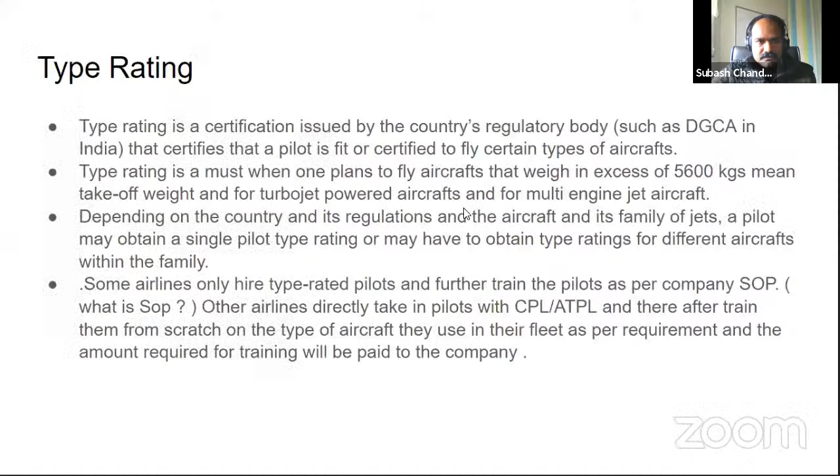So starting, I will just share the screen. I think it is unshared. You have to share it again. Yes. Yes, sir, shared.

So the topics for discussion are a small brief introduction on the history of flight, and we'll also be talking on basics of aerodynamics. Actually, this would be best if we were able to show some working model, or show the aircraft and then explain. That would be much better. But the problem is we have to take a lot of permissions in order to video shoot such programs or talks. We have to take prior permission. Sometimes we get permission, sometimes we don't. So there are a lot of hurdles.

So I have picked up a few videos from YouTube. As we keep discussing various topics, I will be playing these videos so that you get a better understanding of the topics. And we'll also cover the legal requirements to get the license, what all you have to do first. All these steps I have briefed to my best knowledge. So I request Captain Raghavendra and Captain Paresh, you can also pitch in in case you want to add a few things.

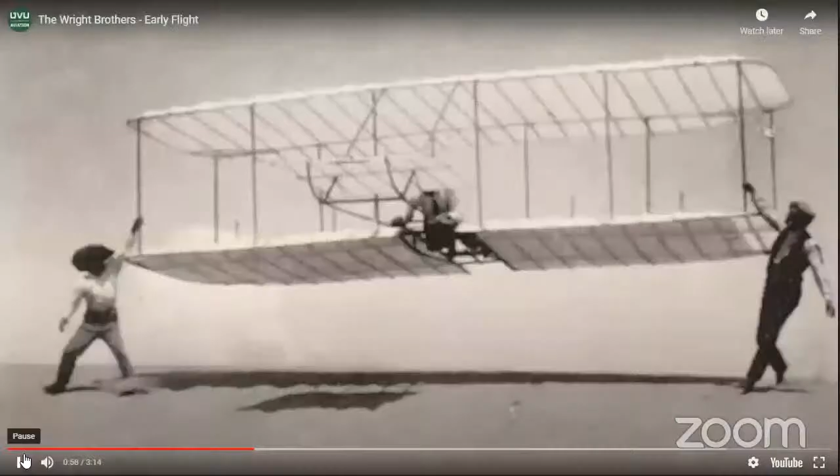In 1901, at Kill Devil Hills, North Carolina, the Wright brothers flew the largest glider ever flown, with a 22-foot wingspan, a weight of nearly 100 pounds, and skids for landing. However, many problems occurred. They decided to build a wind tunnel based on Francis Wenham's research to test a variety of wing shapes and their effect on lift.

During 1902, the brothers flew numerous test glides using their new glider. Their studies showed that a movable tail would help balance the craft based on the center of gravity, and the Wright brothers connected a movable tail to the wing warping wires to coordinate turns.

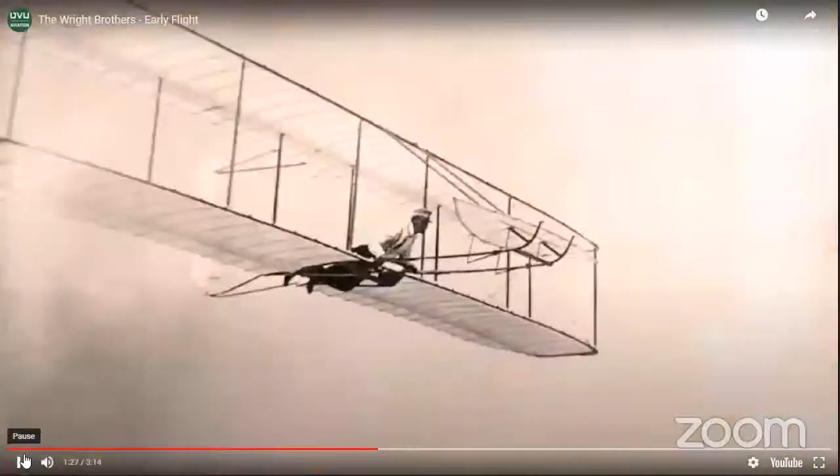After months of studying how propellers work, the Wright brothers designed a motor. This was attached to a new aircraft sturdy enough to accommodate the motor's weight and vibrations. The craft weighed 700 pounds and came to be known as the Flyer.

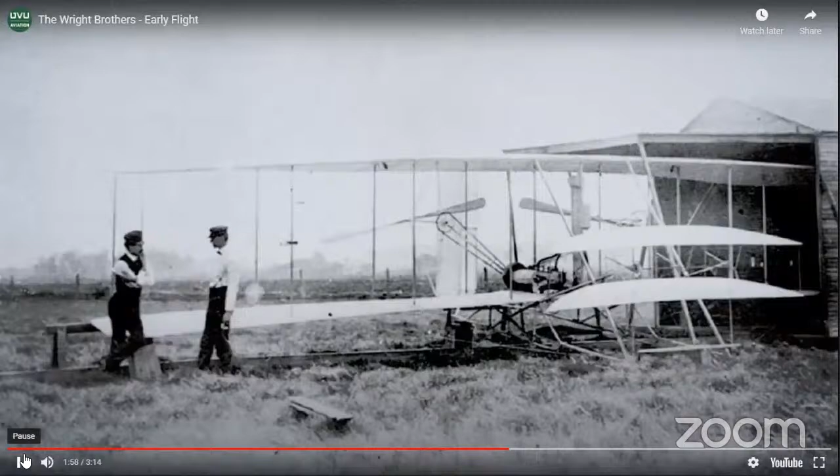The Wrights further refined the wings by covering the bottom surfaces with fabric. This resulted in a smoother overall wing surface, which enhanced its aerodynamic efficiency. The brothers continued to apply the fabric in the direction of the weave at a 45-degree angle to increase the stiffness of the wings.

One of the most innovative aspects of the 1903 Flyer was its propeller. The Wrights decided to treat the propeller as if it were a rotating wing. They reasoned that the same physics that generated an upward force or lift on a curved surface in a flow of air would also produce a horizontal force or thrust when such a surface was positioned vertically and rotated to create the airflow.

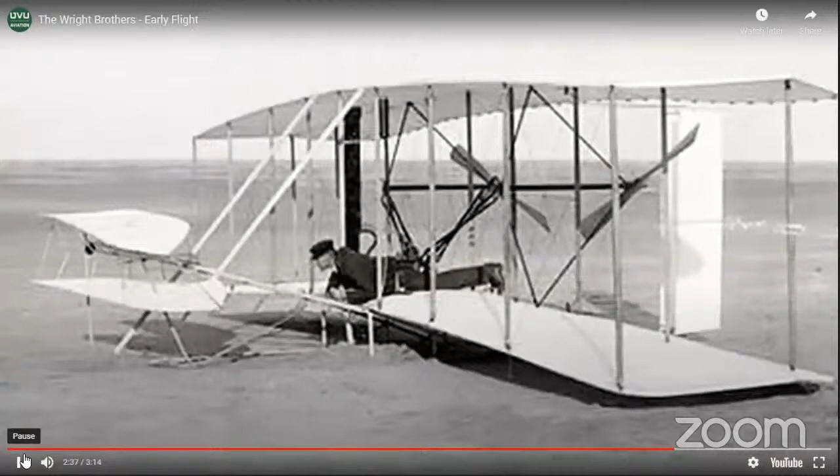The brothers built a movable track to help launch the Flyer. This downhill track would help the aircraft gain enough airspeed to fly. After 2 attempts to fly this machine, one of which resulted in a minor crash, Orville Wright took the Flyer for a 12-second sustained flight on December 17, 1903. This was the first successful, controlled, powered, and sustained heavier-than-air human flight in history.

In 1904, the first flight lasting more than 5 minutes took place on November 9th. The Flyer 2 was flown by Wilbur Wright.

So hope this video was very informative. It has explained the struggle of the Wright brothers.

Am I audible now? Yes, sir. Yes, yeah.

It is not just the first instance of them making this machine, because they didn't have ideas initially when they started. They thought just by having a propeller and a motor and then having a bird-like wing structure, they could make flying machines. But later on, they discovered and learned that altering the shape of the wing is one of the main aspects where you can achieve flight.

The next topic I am going to discuss would be basically on aerodynamics. What makes an aircraft actually fly? What is the thing which is generating the lift in the aircraft? Of course everyone knows that without wings, the aircraft can't fly. But only making a wing, what is the shape of the wing? All these things we will see in the next topic.

So from being a small aircraft carrying a single passenger, slowly to present day we are carrying hundreds of passengers at a very high level of comfort. This is what aviation has traveled from 1903 to 2020, roughly around 120 years.

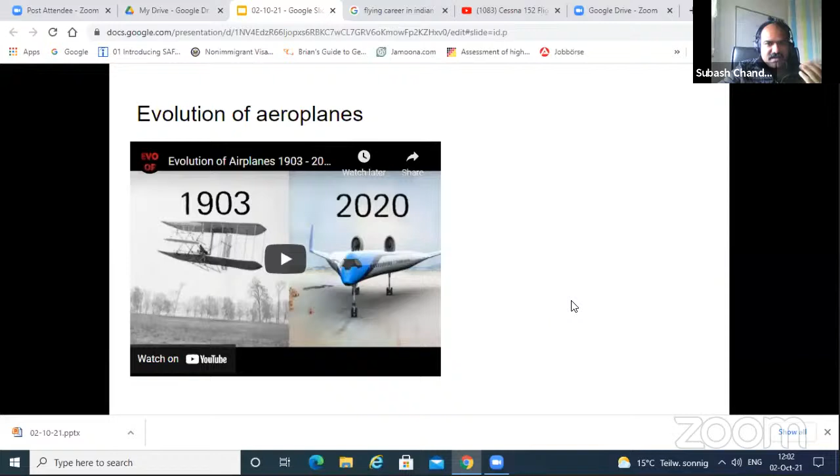So now we'll be speaking on basically how lift is generated. When the Wright brothers made the wing, they gave a particular shape for the wing which we call a camber. If you see it on cross section, it is a C type of camber section, where when the air flows over this particular structure, a pressure difference is created, and due to this pressure difference, the lift is generated.

I have a small video, because just by speaking, many children will not be able to understand this concept. So I have a small video to show over here, where they give a very good explanation as to how exactly this lift is generated.

Before starting this, when we talk about aircraft, there are three main parts. One is what we call the fuselage, the main body of the aircraft, where the other two elements get fixed. Then we have the main plane or the wing, and the other section is called the tail plane or the tail of the aircraft.

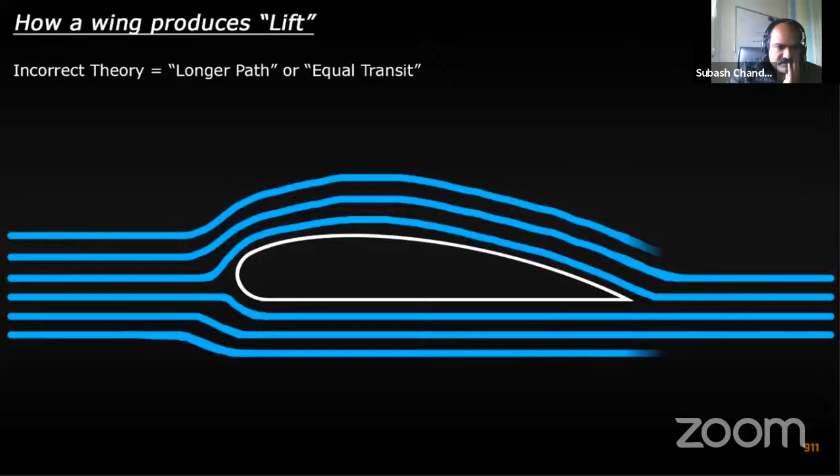So one of the most common but incorrect theories which is taught is something called the longer path or equal transit theory, based on the Bernoulli principle. This theory explains that the airflow hitting the wing splits as it hits the front of the wing. The air passes over and under the wing and rejoins at the back at the same time. For this to happen, the air flowing over the top of the wing has a further distance to cover over the curved surface.

So here I'd like to interrupt. Children, what you have to imagine is that air is also a fluid. As you see, water is a fluid - same way, you should imagine air also as a fluid. Then you will be able to visualize this concept much better.

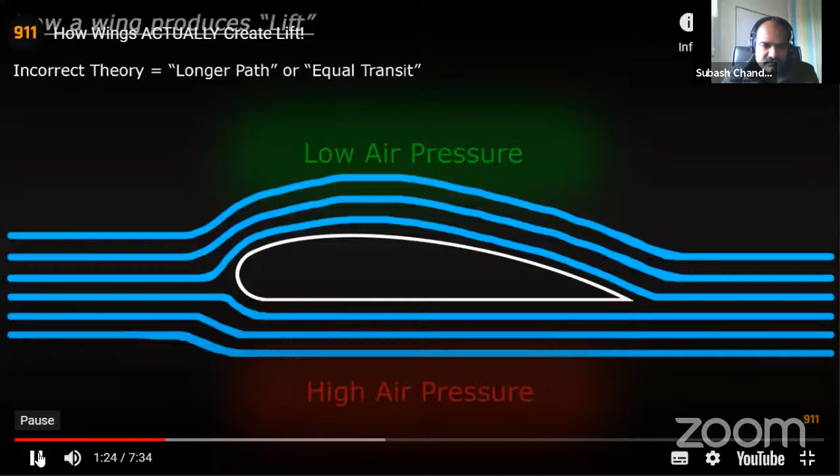As the air speeds up, it causes an area of low air pressure above the wing. The air which passes underneath the wing slows down because it has a shorter distance to travel, and this causes high air pressure below the wing. The end result, this theory states, is that it's this pressure difference above and below the wing which causes the wing to move upwards, and this upwards force is more commonly called lift.

Now there are a few aspects of this theory which are correct, but it doesn't tell the full story. So I'm going to give you the correct answer first and then try to explain what's going on after. The correct answer is that lift is created because a wing or an aerofoil is turning the airflow and directing it downwards. It's not a pressure difference which creates lift.

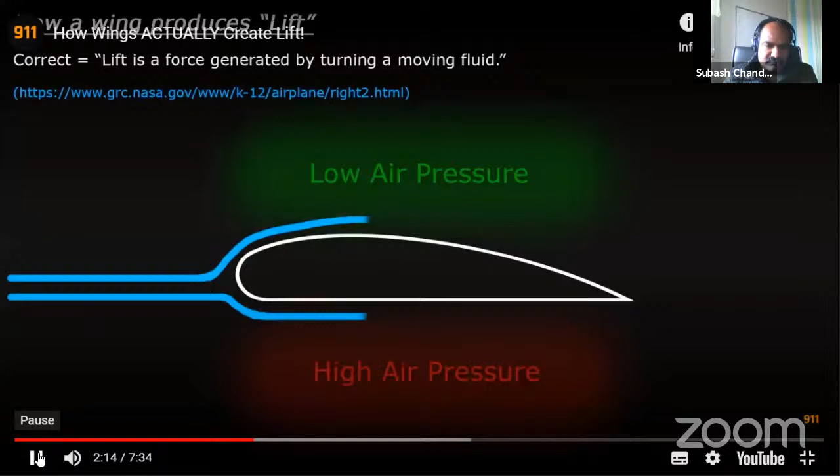So here comes my attempt at explaining it, and again, physicists please be gentle with me. The airflow hits the front of the wing and splits, the same as before. Also, Bernoulli was correct when he talked about the difference in air pressure above and below the wing, and he was also correct in saying that the air which flows over the top of the wing speeds up.

The air which passes over the wing sticks to the top of the wing and follows the curve of the upper surface. This sticking phenomenon is known as the Coanda effect. As the airflow leaves the wing at the back, it leaves at a slight downward angle because of that curve.

That downward deflection also affects the air which passes under the wing and turns it in a downward direction. It's this turning of the airflow which causes lift. You can generate more lift in two ways. The first is by increasing the speed at which the air passes around the wing. This is generally attained by...

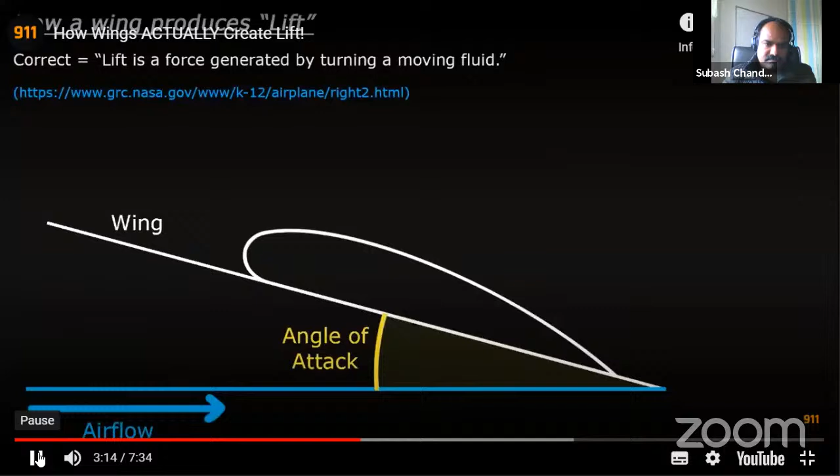You can also increase something called the angle of attack. This is the angle of the wing relative to the airflow. In this example, the wing is pointed directly into the airflow. However, if we increase the angle of attack, the wing is tilted backwards. This creates more lift because the airflow is turned downwards at a sharper angle.

I just want you to remember this word, angle of attack. So angle of attack is the angle made by the wing with the relative airflow.

You can see that when the plane is taking off or landing, especially when taking off, you increase the angle of attack. Later on, when I speak about different maneuvers taught in training, we'll talk about stalls. There also you come across the same phenomenon, angle of attack.

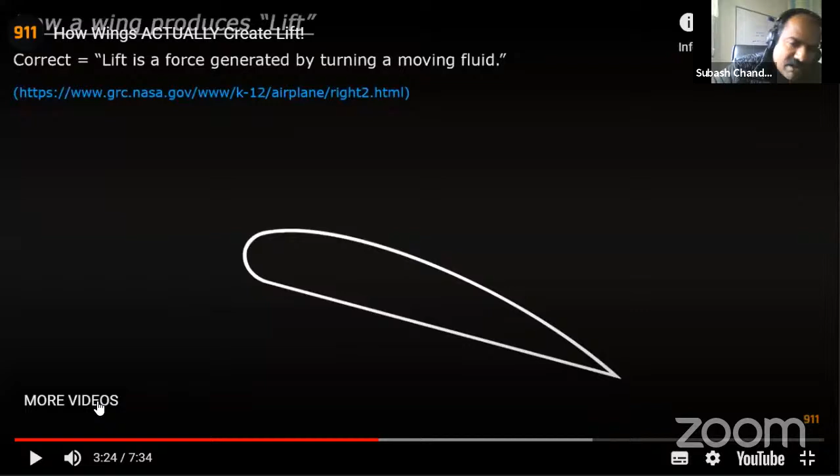Subash, I would like to interrupt. Maybe we should tell them about the four forces of flight. Yeah, that is coming. Raghu, that is coming in the next video. Yeah.

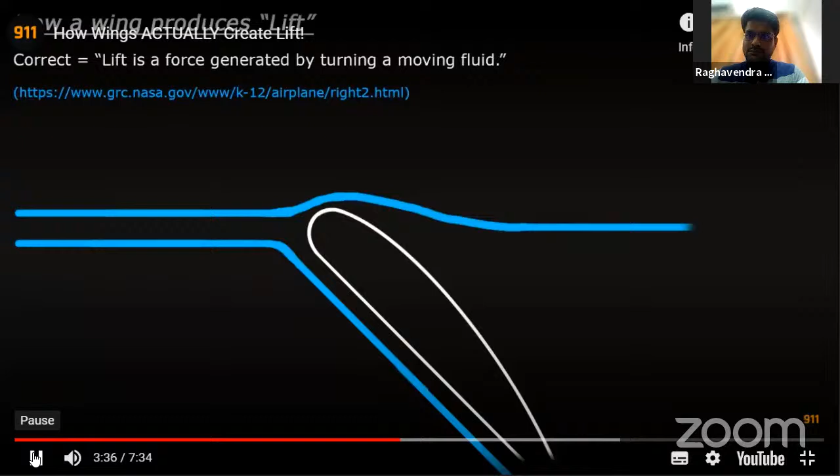Now there is a danger to increasing the angle of attack too much. If you increase that angle too far, there will come a point where the airflow cannot turn and follow the top of the wing. When this happens, the airflow separates from the top of the wing. This is what happens when an aircraft stalls. There is no steady flow of air over the wing, so the wing stops producing lift and the plane begins to literally fall out of the sky.

There are a couple of devices used on aircraft which help increase the amount of lift a wing can generate. The main one is flaps. The flaps on any aircraft are designed... I'll come to this topic later.

Now you have an idea of how lift is generated in an aircraft. The section is called an airfoil. The main lift-producing surface is the wing, and the shape of that section is what we call the airfoil. This enables the aircraft to generate lift, and we use engines to develop thrust so that more and more wind flows over the wing.

Next I will just touch on the airframe. As I told you earlier, we have the fuselage, the wing, and the tailplane. These are the three main parts of the aircraft. The fuselage is the main body of the aircraft, running from the nose to the tail end. To this tubular structure we attach the wing, and then we attach the tail.

An aircraft's motion can be described as rotation around three axes: the vertical axis, the longitudinal axis, and the lateral axis. These are imaginary axes. The longitudinal axis runs from the nose to the tail. The lateral axis runs wing to wing. The vertical axis runs up and down. All these axes meet at a point at right angles to each other.

And the lateral axis. The axes of an aircraft are three imaginary lines that pass through an aircraft's center of gravity. All three axes pass through the CG at 90-degree angles to each other. The longitudinal axis passes through the CG and runs from the nose to the tail of the aircraft. The lateral axis runs parallel to a line from wingtip to wingtip.

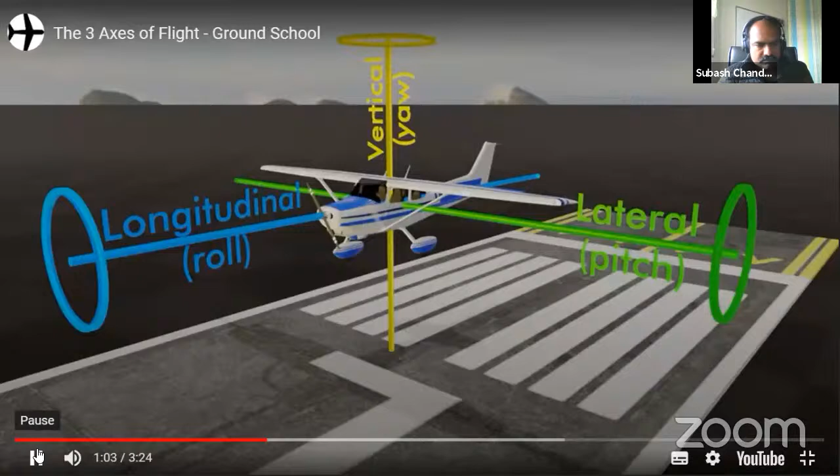The vertical axis passes through the CG at right angles to the other two axes, running through the top of the aircraft to the bottom of the aircraft. Whenever an aircraft changes its flight attitude or position in flight, it rotates about one or more of these three axes. The motion about an aircraft's vertical axis is called yaw.

Now just yaw, see, or rotation about the vertical axis, is controlled by the rudder. Now this yaw motion is the motion about the vertical axis, but it's happening on the longitudinal plane. So to do this particular yawing motion, we use the rudder.

As shown here in this particular video, the rudder is activated from the cockpit using rudder pedals. So we have pedals on both the legs. You press the right leg, you have the right rudder deflected, and you press the left, then the rudder moves to the left. So it's basically a chain and pulley type of arrangement. Located on the tail of the plane. See the motion of the rudder here.

The motion about an aircraft's lateral axis is called pitch. Now you see, when they're doing the pitch, the control responsible for the pitch is the elevator, which is at the tail of the aircraft. Pitch in conventional aircraft is controlled by the elevator located on the tail of the plane.

The aircraft's motion about its longitudinal axis resembles the roll of a ship from side to side. In fact, the names used to describe the motion about an aircraft's three axes were originally nautical terms. They have been adapted to aeronautical terminology due to the similarity of motion of aircraft and seagoing ships.

Roll is also referred to as bank and is controlled by the ailerons located on each end of the wing. The two ailerons deflect in opposite directions of each other. The reason for this is that when one wing goes up, the other must go down. As mentioned earlier, these three axes all pass through the aircraft's center of gravity. The rudder, ailerons, and elevator are primary control surfaces.

Flaps are a secondary control surface. They are not used to control movement around any of the...

So we'll come to the secondary control surfaces later. Now, I think you have a brief idea about the three axes and what motions are happening on these three axes. So you have the yaw, you have the roll, and then you have the up and down motion, which is controlled by the elevators. Now, all these three axes in a normal flight pass through the center of gravity. Okay.

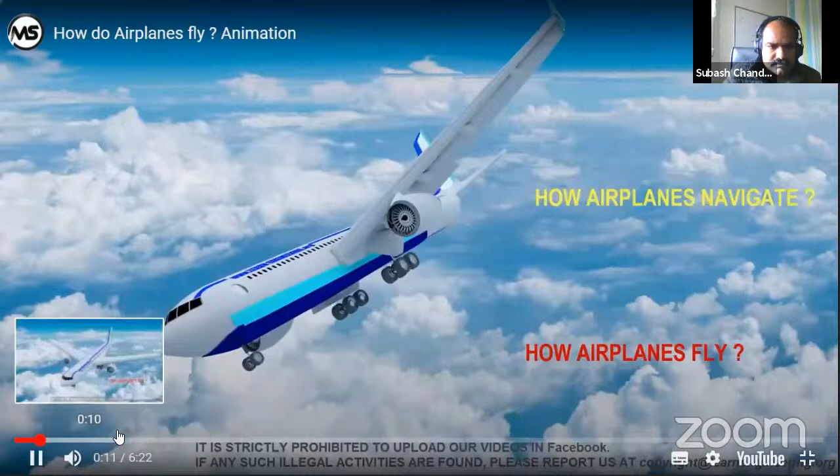Over the last few decades, airplanes have certainly revolutionized the way we travel. But have you ever thought of how it flies? How does it navigate? We will get answers for these questions from this video in a simple yet scientific way. We will also explore how the flight is controlled in a real-time manner. First, let's look at some history. Many crazy flying machine designs were tested in the 19th century because of mankind's

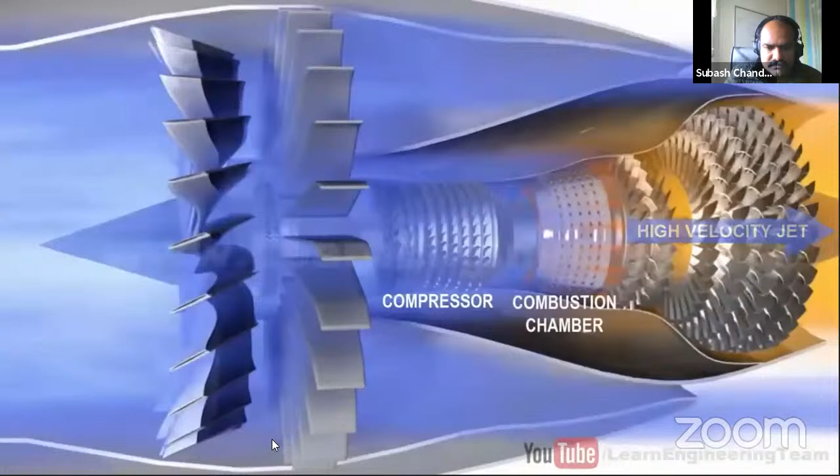I'll just forward it a little bit so that thrust force... chamber and turbine stages. The engine also derives the thrust force from the fan's reaction. Let's look at the wing. You can note that the wing of a modern aircraft is a collection of different parts. During the takeoff, the flaps and slats are extended downwards as shown.

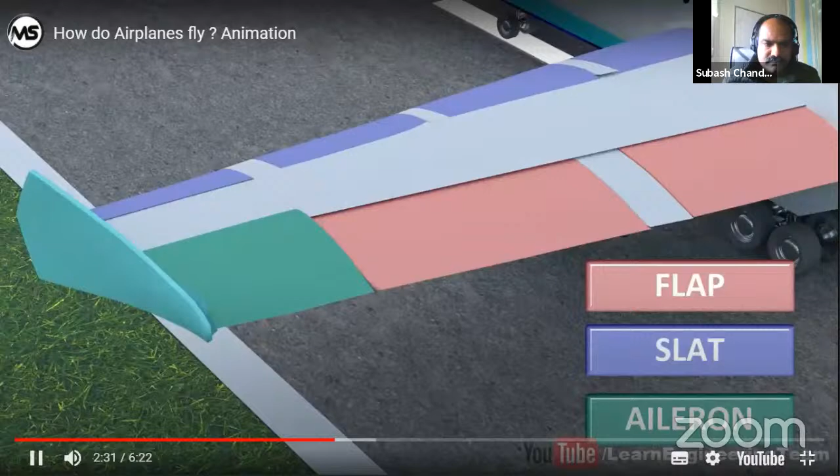Now here I just want to mention, see the red markings, what you see here, the red structure, what you see are basically the flaps. Flaps are closely attached towards the fuselage of the aircraft, the place where the wing is connected to the main structure, and you have the ailerons over here, which will be after the flaps. The green structure, what you see here.

The wing area and curvature of the airfoil. As the curvature increases, air will be deflected more. Thus, a greater lift force can be derived even at low airplane speed. As the airplane speed increases, the lift force rises. Finally, when the lift is more than the gravitational force, the plane takes off.

So basically here, the flaps and slats are just increasing the surface area of the wing. When the surface area increases, the total amount of lift also increases at a lesser speed. That's the main reason for slats and flaps. And one more, when you're having a big aircraft, you use slats and flaps to increase the lift, and it also decreases the length of runway run which is required to lift off.

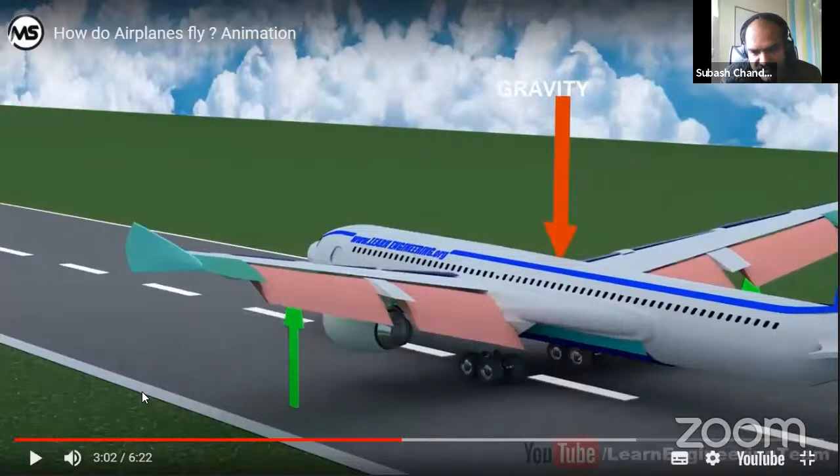So basically, if you need more lift at a lower speed, you increase the surface area of the wing. At a lower speed, we can have what's called a velocity of lift. So we will reach that certain speed at which lift off can happen based on the amount of flaps and slats that we use as well.

During the normal flight, flaps and slats are put into their original position. It is interesting to note that different forces acting on the airplane balance exactly each other during the normal flight. Now let's get into the core of the flight navigation. You can navigate the airplane the way.

Okay. I also have just one more video.

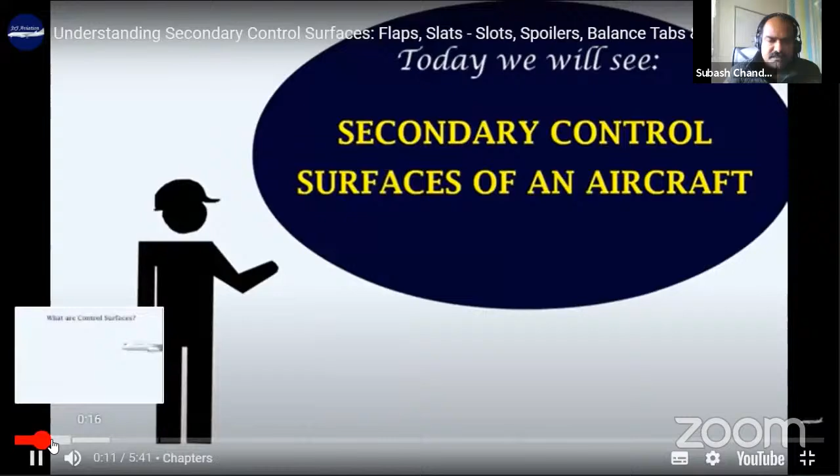Hello, this is Tim. Today we will talk about the secondary control surfaces of an aircraft. First, let's see what are control surfaces. Control surfaces can be classified as primary control surfaces and secondary control surfaces. The primary control surfaces are elevator, rudder, and ailerons. They are used to pitch, yaw, and roll the aircraft. The primary control surfaces are mandatory in all aircraft.

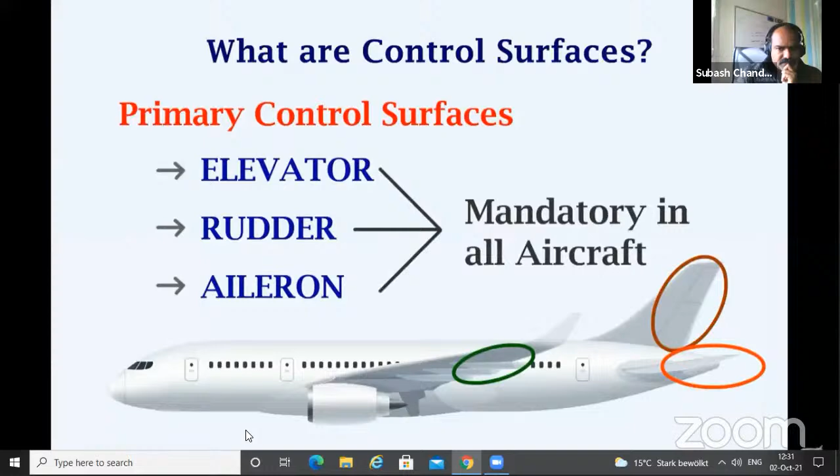Now let's look at the secondary control surfaces. Unlike primary control surfaces, these are not mandatory in all aircraft. These control surfaces are used to improve the performance characteristics of the airplane and also provide assistance in flying the aircraft. Now let's look at some secondary control surfaces. First, we will see the flaps. Flaps are located at the trailing edge of the wing. They are classified as a high lift device on the aircraft. Let's look at the cross section of the wing and the flap in more detail.

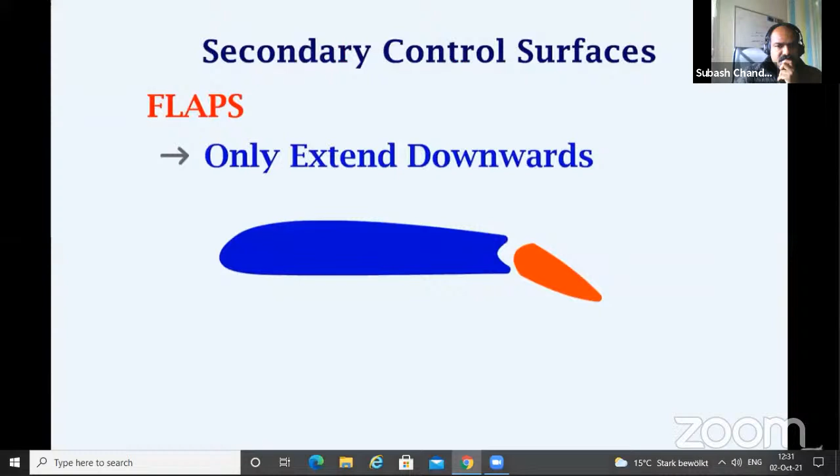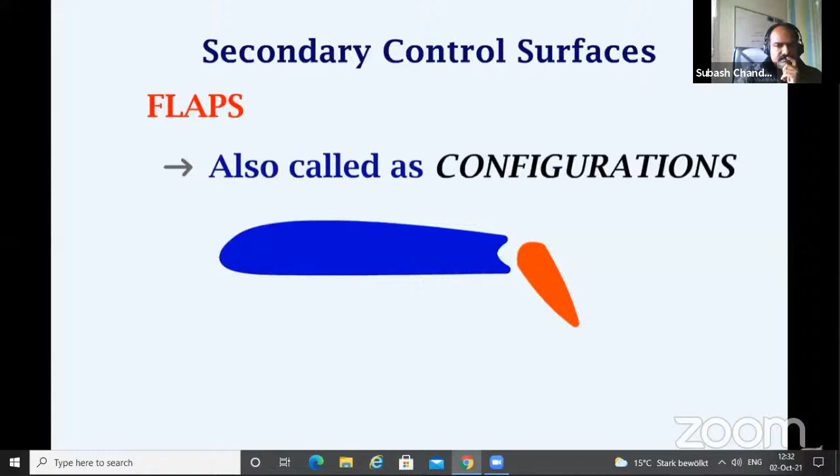Flaps will have more than one setting or angle of deflection and are used during takeoff and landing. These settings are also called configurations. Flaps are locked in a particular configuration by pressure brakes. During takeoff, flaps are extended to a small angle, and during landing, they are extended to the maximum angle. So the flaps provide high lift at low velocities.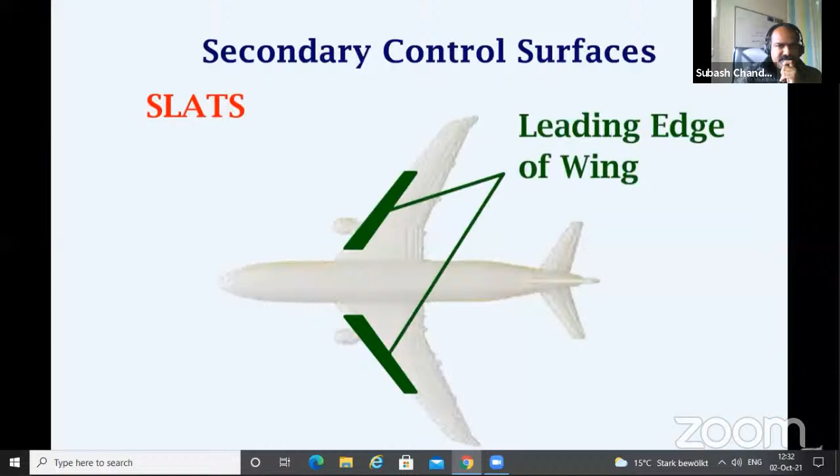The next secondary control surface we will look at is the slats. Slats are on the wing. They are also classified as a high lift device. Like flaps, the slats can only extend downwards. As it goes downwards, the camber increases, so the lift also increases because of the increase in CL. The main advantage of the slat is that it increases the stall angle, so the aircraft can fly at a higher angle of attack. Like the flaps, the slats also have different configurations and are used during takeoff and landing.

In some aircraft, when they are flying at high angles of attack, the air is allowed to flow through the gap between the slats and the wing. These are called slots.

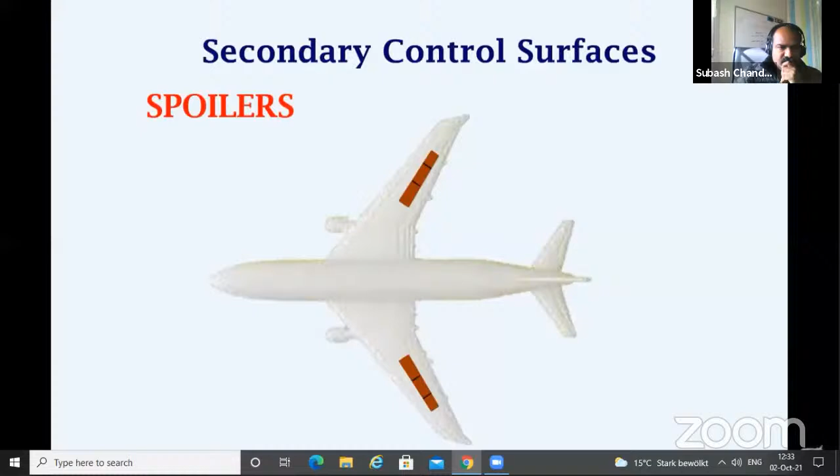The next secondary control surface we will look at is the spoilers. The spoilers are located on the upper surface of the wing. They are mainly used to reduce the speed and the lift of the aircraft. The spoilers can only deploy upwards. This spoils the airflow on the top surface of the wing, which increases the drag on the aircraft.

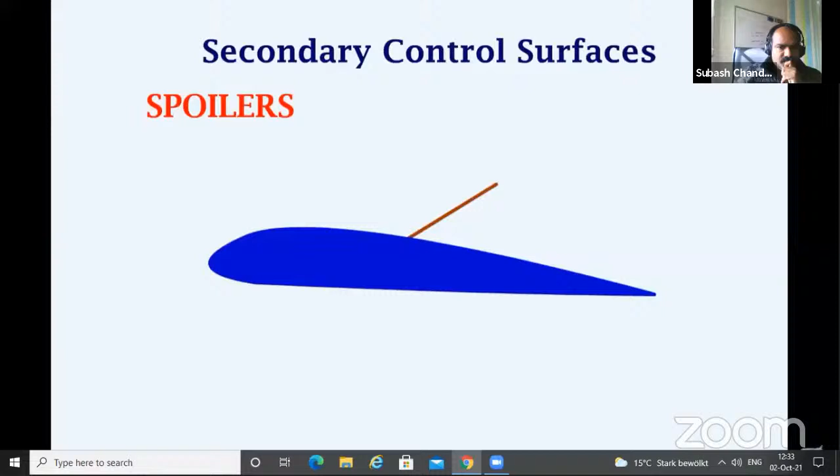Spoilers are used in flight to reduce the aircraft's speed and to rapidly decrease the aircraft's altitude. They are used during landing to rapidly increase the drag to stop the aircraft safely. The difference between spoiler extension in flight or during landing is that the angle of deflection changes.

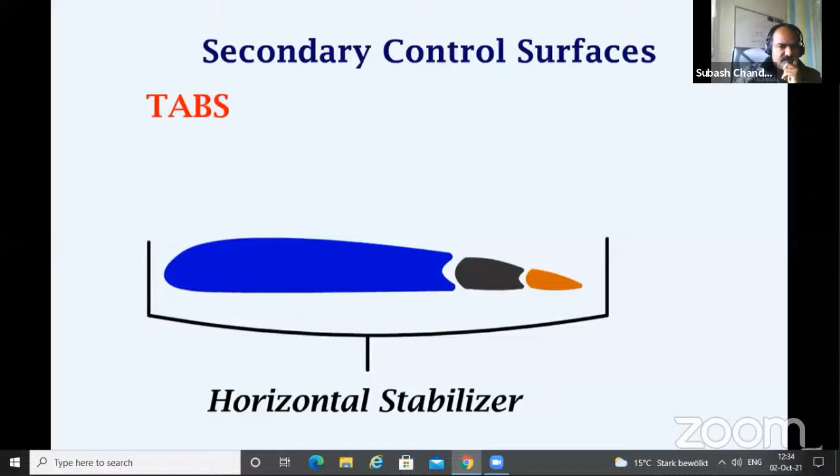The next secondary control surface we will look at is the tabs. These are attached to the primary control surfaces of an aircraft. The tabs are installed on the trailing edge of the primary control surface. Let's look at the horizontal stabilizer to understand the working of tabs. This is the elevator and this is the tab attached to the elevator. The tabs can be classified as balance tabs or trim tabs.

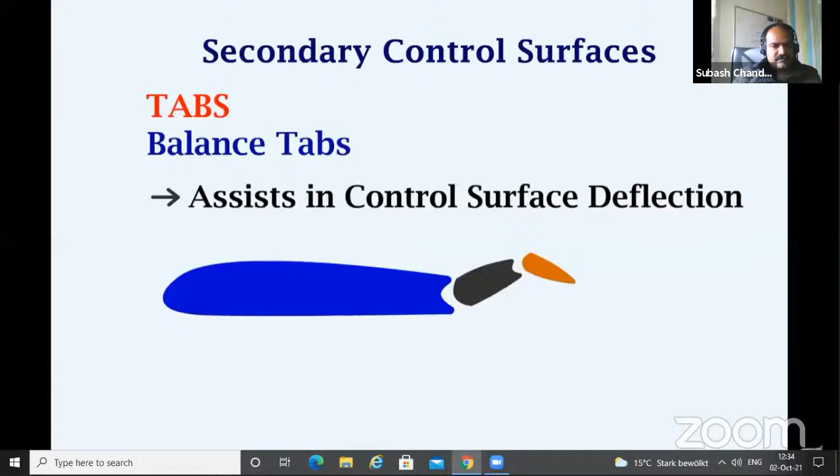First, let's look at balance tabs. If the elevator has to be deflected down, the tab will be deflected up. The airflow will push the tab and the elevator downwards. Hence, the balance tabs will assist in the deflection of the control surfaces. So, if the elevator has to be deflected up, the tab has to be deflected down. Now the airflow will push the tab and the elevator upwards. This is extremely helpful if the aircraft has a cable pulley system for the flight controls.

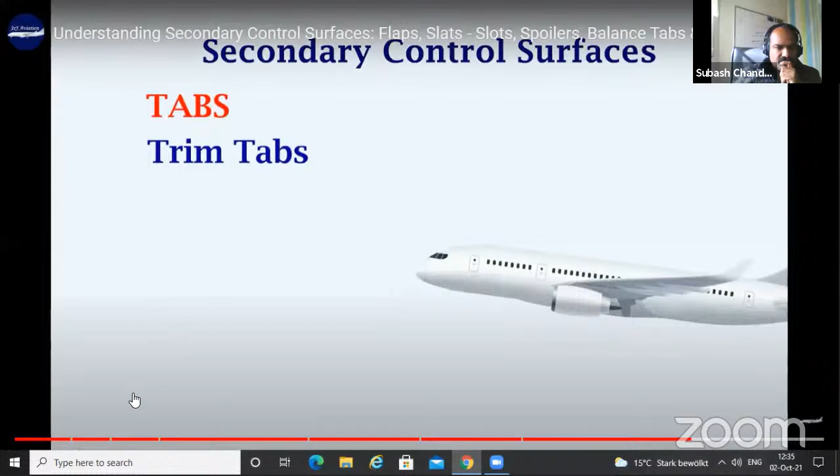Now let's see trim tabs. These tabs are controlled by a trim wheel and are used to reduce the pilot's workload. To understand this, let's consider an aircraft flying with the nose up condition. Now the aircraft is said to be out of trim. For efficient flying, the aircraft must be flown straight and level, which means the aircraft needs to be trimmed for level flight. The pilot, however, cannot keep holding the control stick forward throughout the flight, so the trim tab becomes useful.

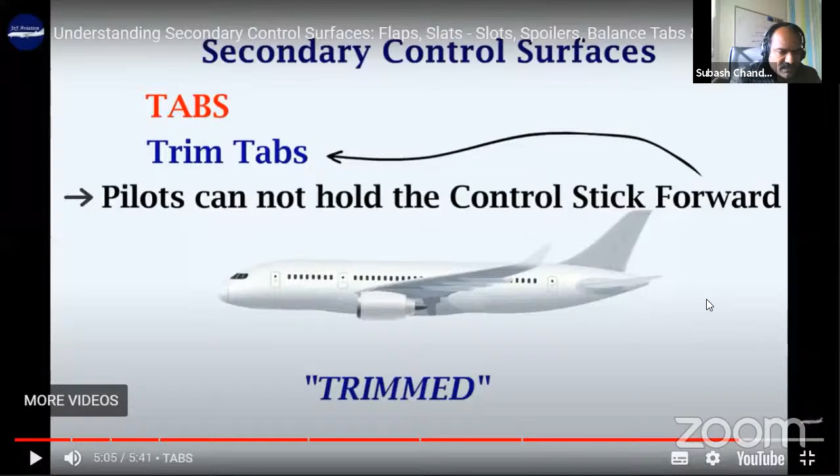So here, the trim tab basically reduces the load on the control column. The control column, in other words, is where you control the aircraft: you control the elevator, you control the ailerons, or the stick. Otherwise, every time a pilot has to maintain a particular pressure on the control column, which is not possible at every instant of time, because it will be a physical strain also. So in order to reduce this, you have trim tabs. You trim your tabs so that the elevator is adjusted or set to a desired level, and then it will relieve the physical pressure on the control column.

You can compare it with a normal door and door stopper. You open a door to a certain angle and put the door stopper, it stops at that particular angle, so you don't have to keep holding the door open. So something like that. I hope they can understand this.

Once the tab is deflected up, the elevator gets deflected down and the tab is locked in this position. The aircraft is now trimmed because the elevator will maintain level flight without any pilot input. We have seen some secondary control surfaces such as flaps, slats, spoilers, and tabs. Depending on the airplane's requirements, one or more secondary control surfaces will be installed.

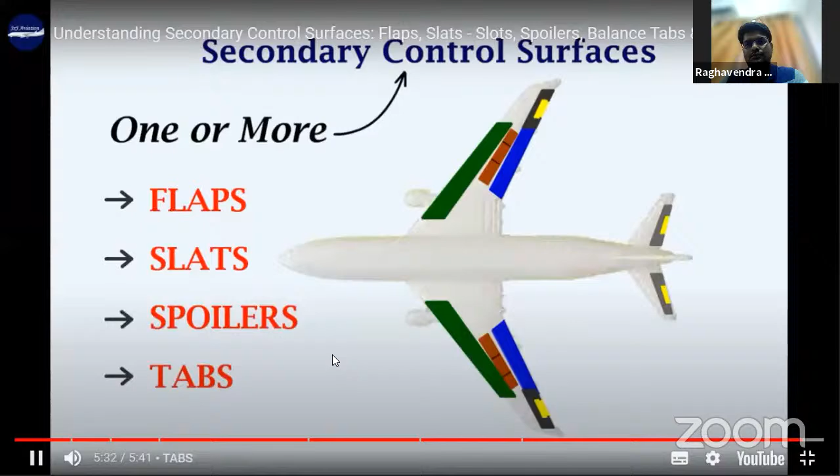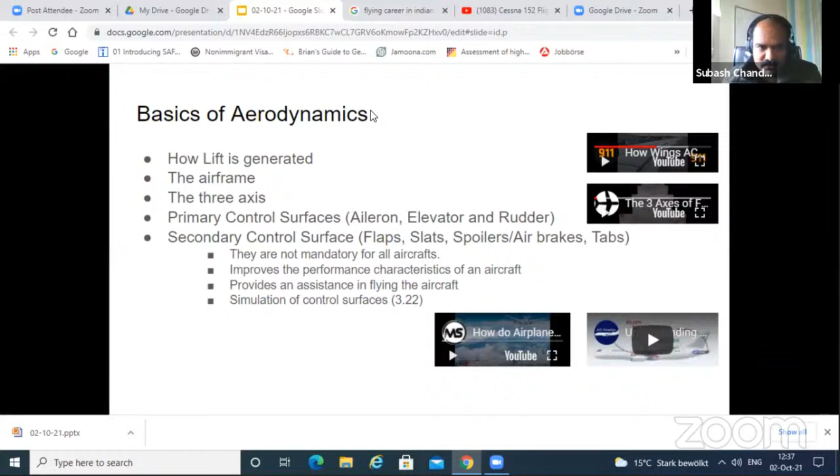Okay. So now I think you have some brief idea about all the primary and the secondary control surfaces. So now we'll go on to the next topic. The main thing, engines, aero engines. Of course, without an engine also you can fly an aircraft. Basically, those are called gliders.

Only thing is you have to again find out a method where you try to increase the speed. So one of the ways is where you have a pulley, you have a cable attached to the glider, and then the winch will rotate. There'll be a drum on the winch, so the cable will get wound onto the drum and it will start pulling the glider, and the glider, as it attains the speed, lifts off, and then after a certain height you disengage the cable. So that is one of the ways.

Or you jump from the cliff of the hill with a hang glider. So that is another way. But having an engine gives you a lot of comfort because you have continuous thrust being produced. So in earlier days when the aircraft were made, even now also, all the small aircraft, the trainer aircraft, basically they're all piston engine aircraft. They use piston engines because the power generated is enough for that particular aircraft.

But when you go to a little bit bigger aircraft, weighing more than 3000 kgs and all these things, you go into gas turbine engines. So in this, there are two things. One is a turbo prop engine and one is a turbo fan engine. So basically, seeing the engine, you can make out whether it's a turbo prop or a turbo fan.

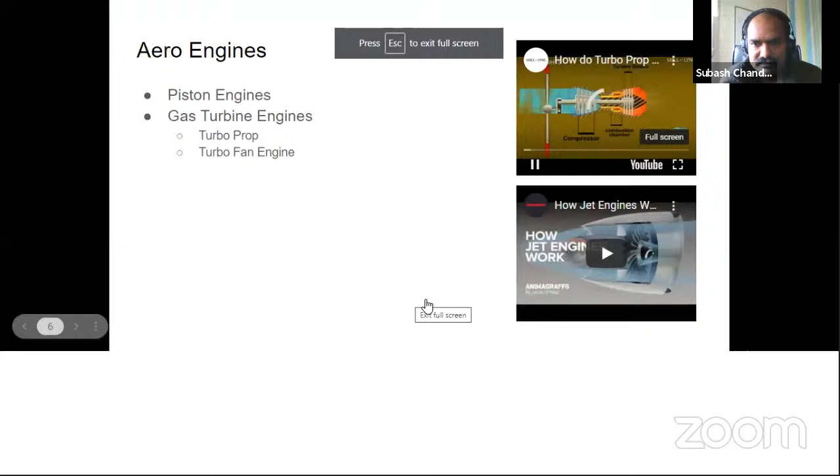Hey guys, welcome to another one of our videos. Basically, when I started flying here on non-scheduled flights, I was flying a turboprop aircraft, and Captain Raghavendra also started flying ATRs, which are turboprops, and now he is flying turbofans, jet engines. In our previous videos, we talked about the working of the turbojet engine and the turbofan engine. In this video, we have another important type of aircraft engine in mind. It is called the turbopropeller engine or the turboprop engine.

The working of turboprop engines is very similar to the turbofan and turbojet engines. The engine has a series of compressors to compress the air. This compressed air is mixed with fuel and undergoes combustion in the combustion chamber. Now, this is where the construction of these engines differs from the other two types of engine. In a turboprop engine, the exhaust thrust is sacrificed in favor of shaft power. This is done by extracting additional power at the turbine stage. However, the propeller is not directly connected to the engine.

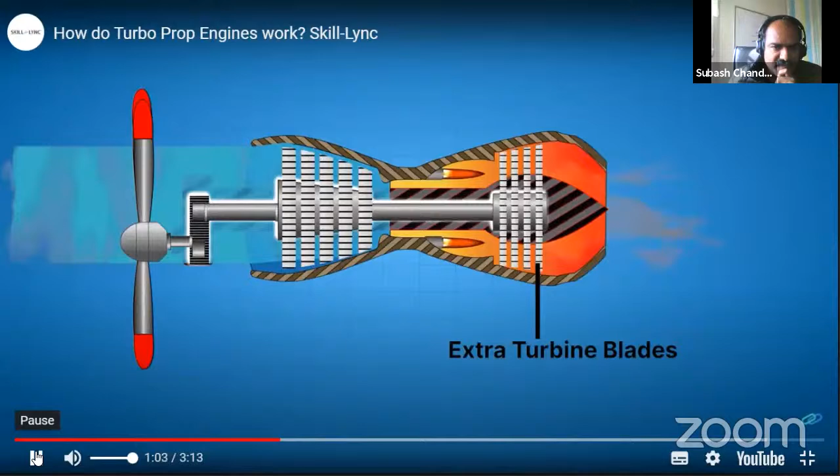Jet engines normally rotate at a speed of 20 to 25,000 RPM. If a direct connection is given, the tips of the propellers will reach supersonic speeds and produce micro shock waves, which will effectively disintegrate the entire propeller. To avoid this, the engine and propeller are connected together by a reduction gearbox. Now, you might be wondering, why do we need to go back to rotating propellers when we already have much more powerful engine types? Turboprops have their own advantage. They're extremely efficient at low aircraft speeds.

Airlines have researched whether customers would rather pay less for a slightly longer flight or more for a short one, and a high percentage of customers stated that they simply just want to get to their destination. Extra time from 15 minutes to even an extra hour doesn't matter to them. This is the reason why turboprop aircraft are used on shorter domestic airline routes. Besides the advantage of higher efficiency, turboprop engines are rugged too. Turbofan and turbojet engines are just as delicate as they are powerful. These engines can be rendered useless if any debris such as rocks, gravel, dirt, or even birds enter the engines.

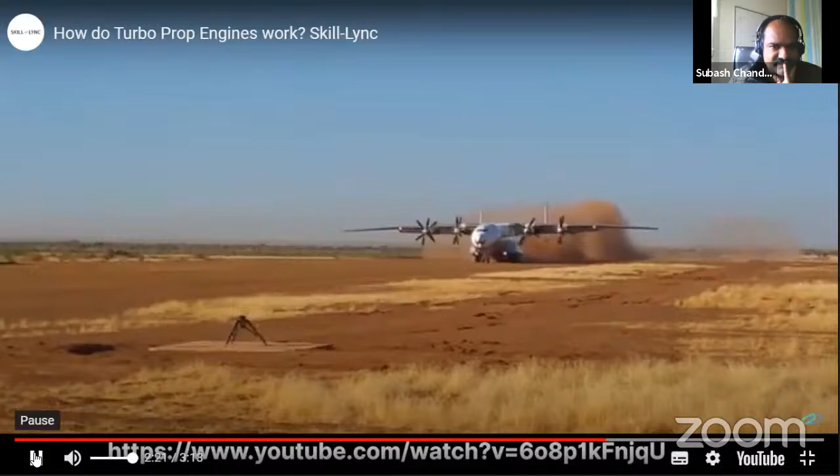Turboprops, however, have far fewer issues with debris because debris is not sucked into the combustion chamber of the engine. The blades may get dented, but this does not cause the engine to fail. The loudest aircraft record is held by a turbopropeller aircraft. The aircraft's name was XF-84H Thunderscreech. It was an experimental turboprop aircraft which was designed to fly at supersonic speeds. Because of this, the aircraft's propellers continuously rotated above the speed of sound, emitting a continuous sonic boom. Well, that's it, guys. Hope you enjoy.

Raghu, you want to add on something to it since you have flown the turboprops for a long time? Yeah, one of the major things is that a turboprop needs the density of air. That is one of the main things for it to fly efficiently. A turbofan, a jet engine like the Airbus 320, is efficient as it flies as high as possible. For a turboprop, at a lower ceiling level itself, you can get a very efficient one.

And the best part is it is very, very fuel efficient when compared with a turbofan engine. That is one of the main things. And controlling this one is more rugged, and the descent profile or controlling the speed is much faster. I can't say it's easier because at times, flying it manually will be tougher than flying a turbofan engine. But the only thing is about the speed, which can be controlled very well with a turboprop.

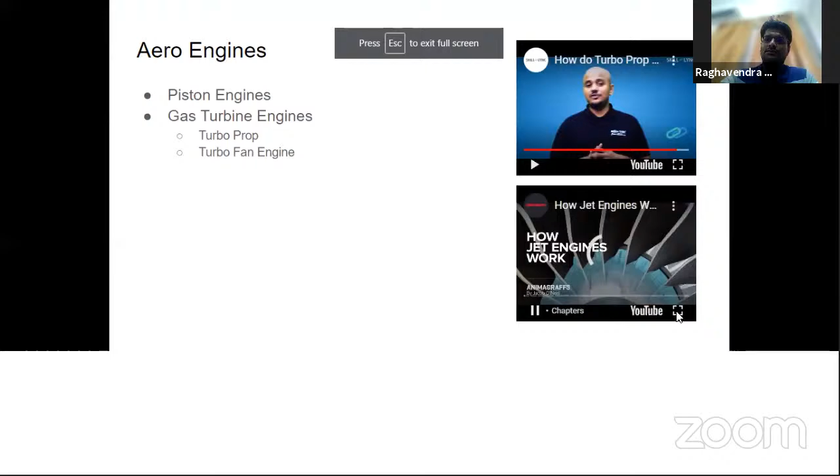Now we will also have a small video to see the working of a turbofan engine or a jet engine. I'm Jake O'Neal, creator of Animagraffs, and this is how jet engines work. Most jet-propelled airplanes use a turbofan design. The turbofan can be thought of as a high-tech propeller inside of a duct called a nacelle, driven by a gas generator. The core. The engine is a gas generator that creates high-pressure gas to power a turbine. This setup has compressor, combustor, and turbine sections.

The compressor. Compressed air makes for a much more powerful combustion reaction relative to engine size. Compression happens in stages that force incoming air into an increasingly narrow chamber. A single compressor stage is comprised of a spinning rotor paired with a ring of stationary stator vanes, which are attached to the core casing.

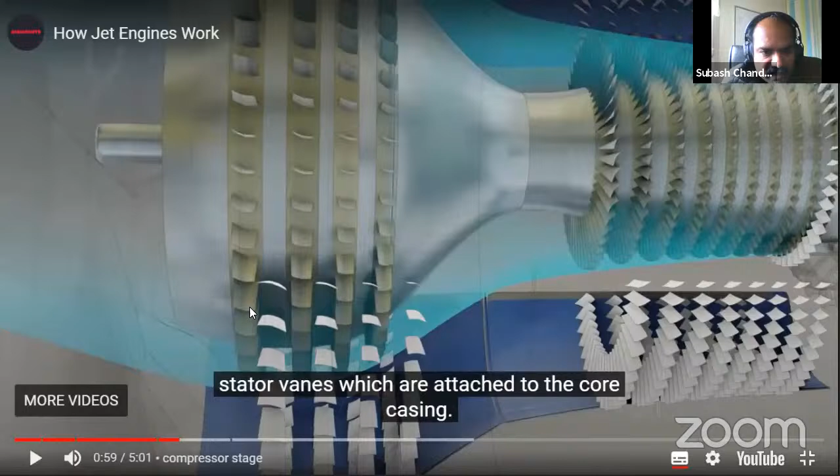Now here you observe these turbo blades. One minute. This one. If you see the shape of the turbine blades inside, it is also a small airfoil. You have one set of rotor blades and one set of stationary blades, and the air gets compressed between these two blades, and it becomes super hot, and then you have again a secondary set of high pressure turbines.

Rotor blades swirl the air as they force it through the compressor. Stator vanes slow this swirling momentum in exchange for increased air pressure. The compressor has 4 low pressure and 10 high pressure stages. The combustor. Air is mixed with fuel and ignited as it passes through the combustor, releasing a jet of super

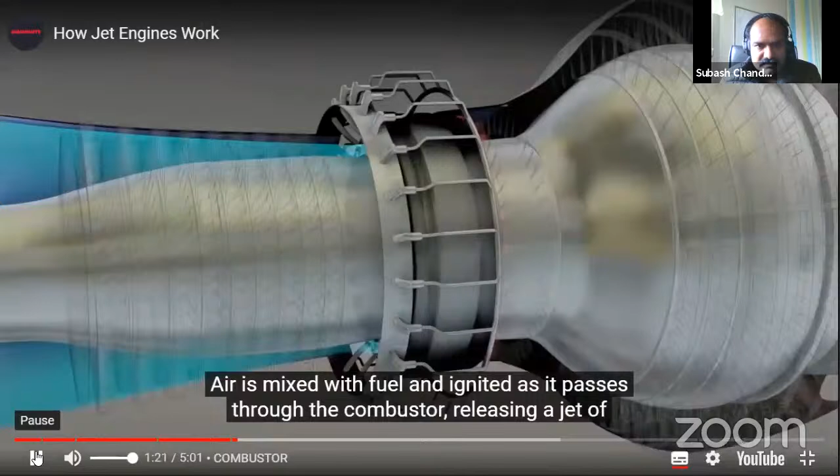At this stage, when the air comes out of the high pressure compressor, it's at a very high velocity and it will be superheated. Already it will be red hot. At this stage, you have the burn cans or the combustion chambers where fuel is sprayed into it. Initially, to start this process, there is something called igniters. As you have spark plugs in your scooters, bikes or cars, here initially to start the process you have igniters, but once the fuel is ignited, you switch off the igniter and it is a continuous reaction.

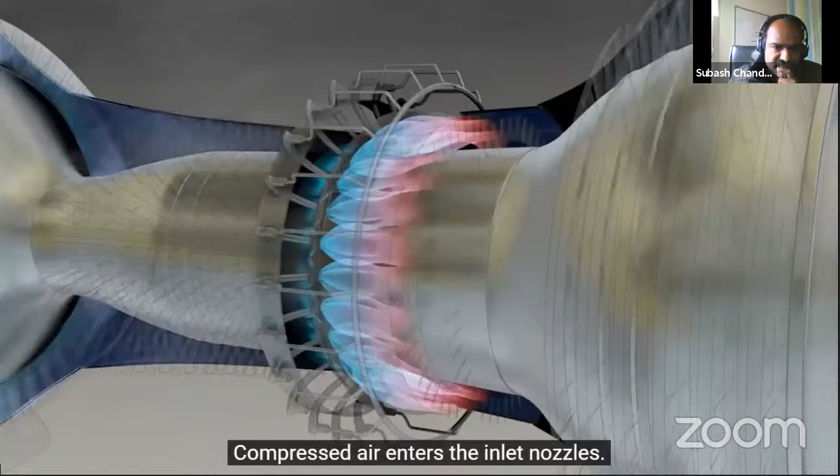High-powered gas. The design shown here is an annular combustor, meaning ring-shaped. Compressed air enters the inlet nozzles. Each nozzle is coupled with a fuel injector and is designed to swirl the incoming fuel and air for an even mix. A couple of igniter plugs, not unlike the spark plugs found in car engines, ignite this mixture, and the reaction spreads evenly around the ring. Once started, combustion continues as long as air and fuel are supplied.

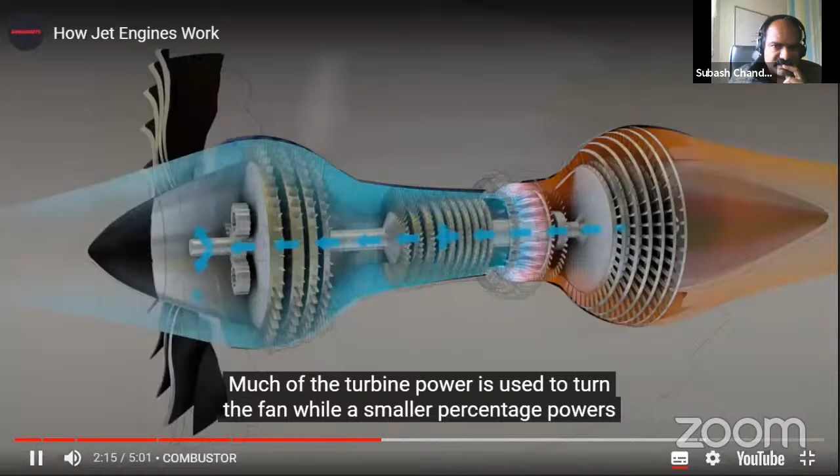The turbine. Turbines at the rear of the jet engine are powered by exhaust gases exiting the combustor. Much of the turbine power is used to turn the fan, while a smaller percentage powers the compressor stages. Turbine fins get extremely hot. Some air from the compressor is diverted for cooling, and special coatings are used to keep temperatures down. The exhaust cone is specially shaped to mix and accelerate exhaust streams. It also covers sensitive internal engine parts.

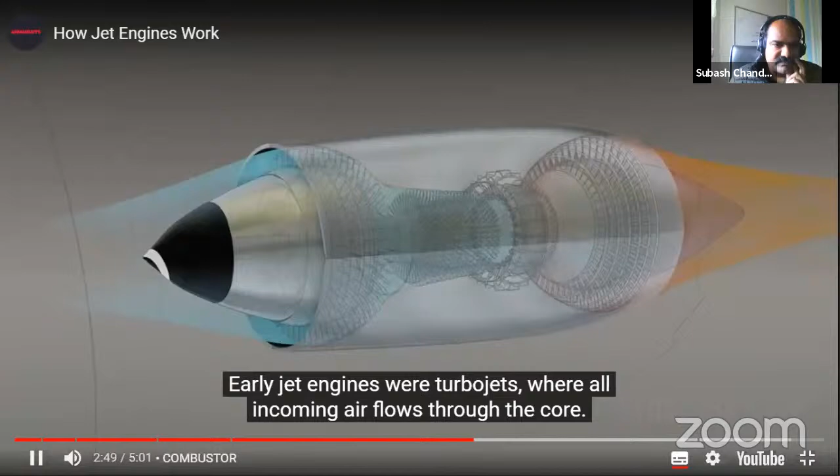The fan. Early jet engines were turbojets, where all incoming air flows through the core. Most modern winged aircraft engines are turbofans, where only a fraction of air enters the core or gas generator, and the resulting power turns a specially designed fan. Again, the fan can be thought of as a high-tech propeller inside of a duct. Air that does not enter the core is called bypass air.

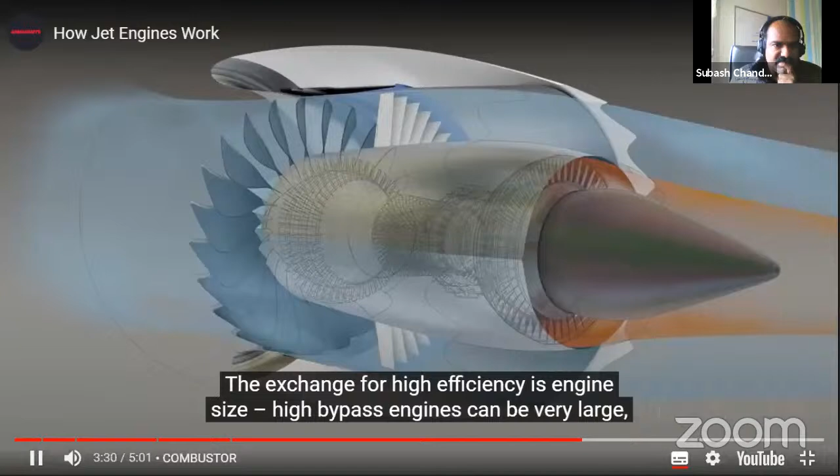High bypass engines are designed to move large quantities of air at slower cruising speeds, a range of about 310 to 620 miles per hour. The exchange for high efficiency is engine size. High bypass engines can be very large, with massive fans compared to core size. Commercial airliners or military transport aircraft are example applications.

Exhaust velocity is a major factor in jet engine noise. High bypass engines surround fast-moving core exhaust with large quantities of slower-moving bypass air for quieter operation.

Military fighter aircraft use low bypass engines, which are more compact, have high power-to-weight ratios, plus supersonic and afterburner capabilities, in exchange for things like poor noise control and high fuel consumption.

So I think you have got a fair idea about the turbofan engine working. You can watch many more videos and get a better understanding.

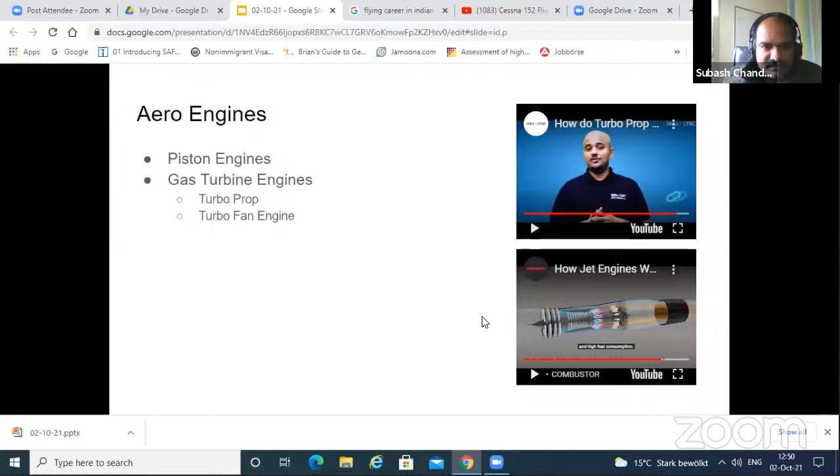Apart from this, now we'll enter into flight instruments. What are the instruments we use basically when we want to fly? So one is an altimeter.

I'll just show a quick video on this. Basically, the altimeter is used to indicate the height at which you're flying. To indicate that, we use this altimeter. So let's look at the principle behind how the altimeter works.

As the name suggests, the altimeter displays altitude above mean sea level to the pilot. The altimeter consists of a flexible aneroid capsule inside a case. You can visualize this aneroid capsule as a small capsule, like a tablet capsule size. It's a small rubber type of capsule.

One thing to remember is that when you are on the ground, the pressure of air is higher. You know what the pressure of air is? It's basically the weight of air sitting on the ground. As you climb higher, the pressure decreases. That is the calculation used to indicate the height.

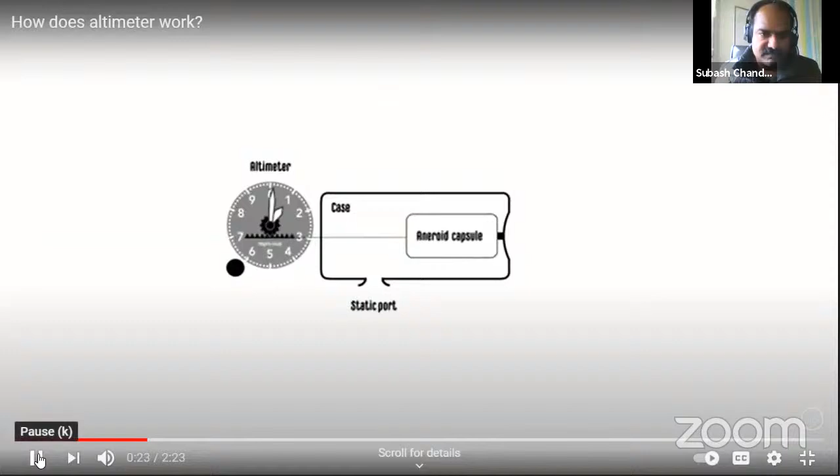The capsule expands or shrinks like a balloon when the static pressure changes as the aircraft's altitude changes. The static pressure is fed only to the case via the static port, which is exposed to the atmosphere around the aircraft. The capsule drives the pointer via a mechanical link to display the altitude in feet. In the atmosphere layer where training aircraft fly, static pressure decreases at a constant rate.

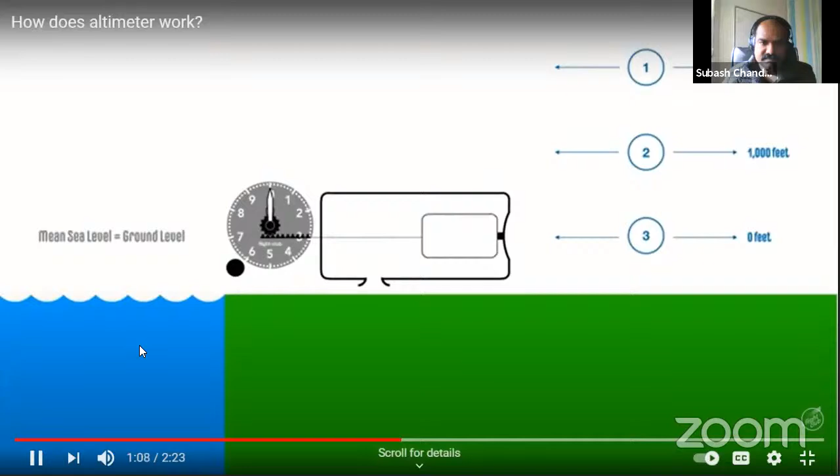For demonstration purposes, let's assume that at mean sea level, static pressure has a value of 3 units. At 1,000 feet, it has 2 units, and at 2,000 feet, it has only 1 unit. In this example, the ground level is the same as mean sea level.

The capsule is sealed with a fixed amount of air inside. Let's assume the pressure inside the capsule matches the pressure inside the case, so both are 3 units, and the altimeter is adjusted to display 0 feet of altitude. When the aircraft climbs to 2,000 feet, the static pressure decreases. Inside the case, the static pressure also drops from 3 to 1. The capsule expands and drives the pointer to display 2,000 feet.

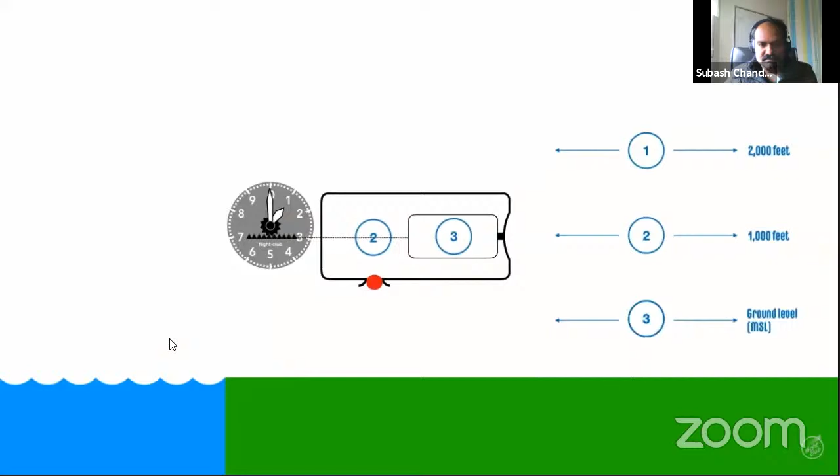Conversely, as the aircraft descends to 1,000 feet, the static pressure increases from 1 to 2, and the capsule shrinks, driving the pointer to display 1,000 feet. Should the static port get blocked, the static pressure will remain fixed inside the case, and a constant altitude will be displayed whether the aircraft climbs or descends.

And you see a small bar here. This is basically where you can set the preset values.

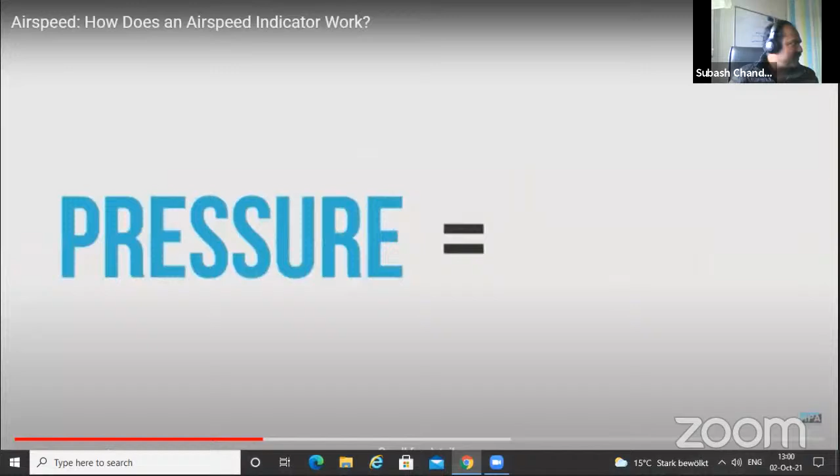You're probably aware of an instrument on the control panel of any aircraft, the airspeed indicator. But how exactly do they work? The answer is pressure. To explain air pressure, imagine you are holding your hand outside the window of a car at standstill. Not much to think about, right? Well, as the car's speed increases, you'll begin to notice a force on your hand. This is called dynamic pressure. As your hand moves through the air, it collides with more air molecules, creating a larger force. Pressure equals force divided by area, and your hand stays the same area, so as the force increases, so will the pressure.

On top of this, a force is exerted on us by the Earth's atmosphere. You don't notice it, but it is called static pressure. So to calculate the total pressure, it is the static pressure plus the dynamic pressure created by the force through the air. But how does this relate to an airspeed indicator? Well, an airspeed indicator is hooked up to a system which measures the static and dynamic pressure and converts it into an airspeed you can see on the control panel.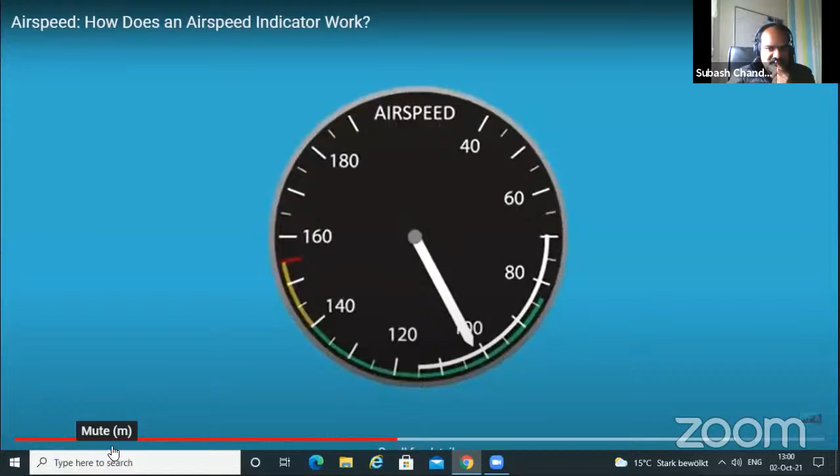Mounted on the fuselage or wing of a plane, you will find funny looking tubes pointing in the direction of travel - these are called pitot tubes. They're hooked up to an expandable diaphragm inside a chamber, and as airspeed increases, the pitot tube experiences an increase in pressure caused by the extra force of air molecules. Another vent runs into this chamber called the static vent. This is located somewhere on the airframe where airflow is minimal, normally at 90 degrees to the direction of travel, and runs into the opposite side of the diaphragm.

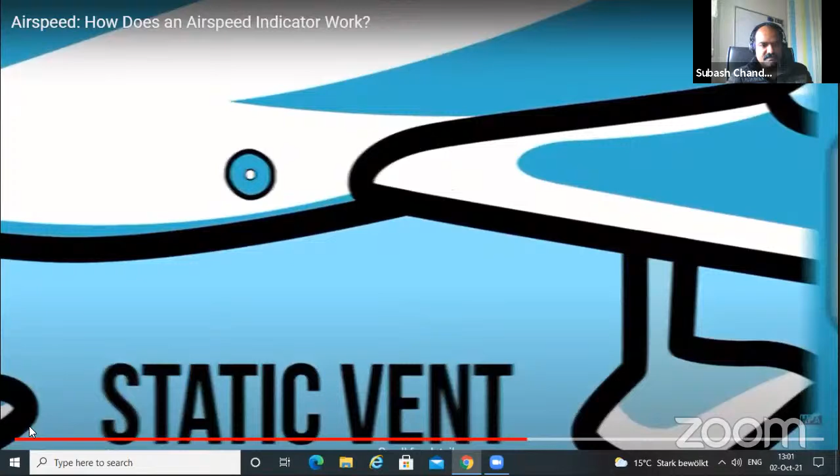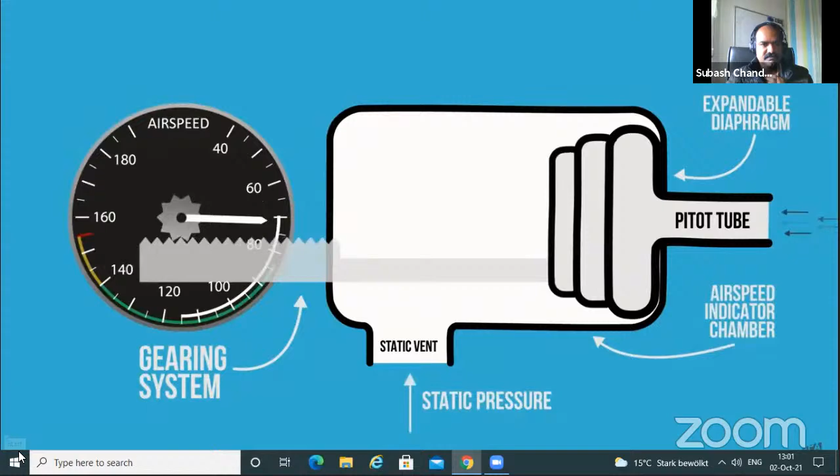So that shows the working.

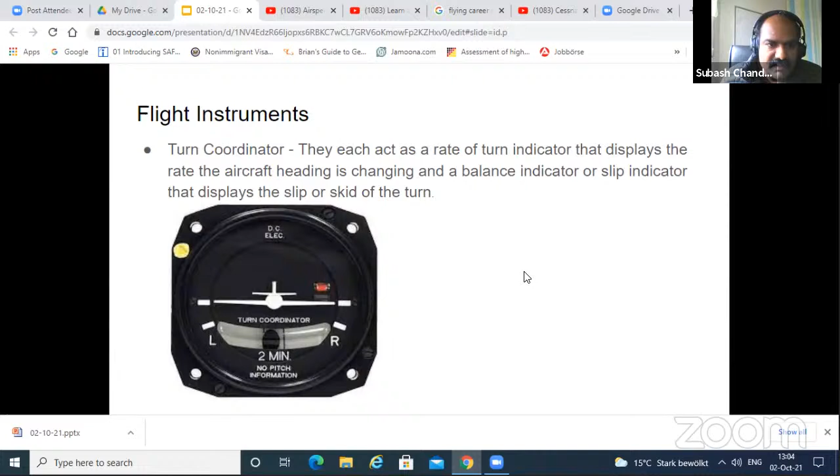Next we have the attitude indicator. Whenever we are flying the aircraft without this instrument, what do we take as reference to know we are maintaining a level flight or flying straight? We look at the horizon. Do you know what the horizon is? It's a line where it seems that earth and sky both are meeting. That is the horizon.

So when we do a normal flight without this instrument, we try to keep our nose in attitude towards the horizon, which indicates we are in level flight. But every time the weather is not so good, you may not be able to see the horizon because of clouds and such things. So you have an indicator called the attitude indicator.

It is basically a gyro. Do you know what a gyro is? The principle behind this instrument is gyro.

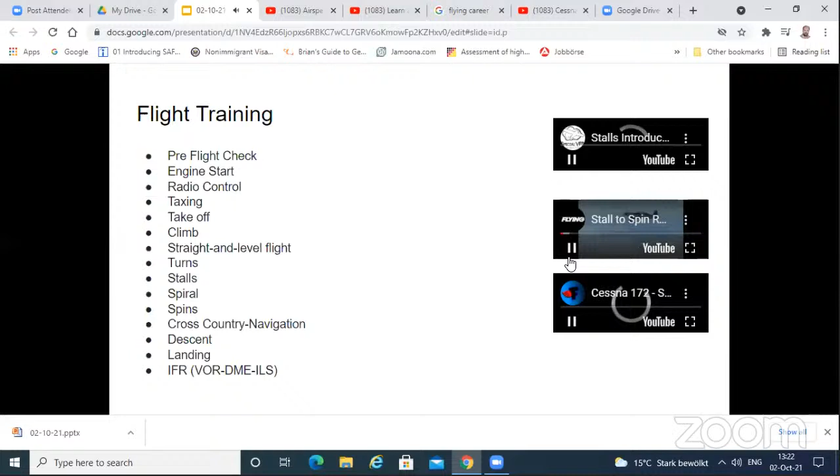I think Subash, are we reaching the end? Because due to the data thing, students are leaving. They will have 1 hour, 1.5 hour data thing. Okay, so I'll just come. Yeah, another 5 minutes.

Okay. Now, in the flight training, what are all the things we are going to cover? These are some of the exercises we'll be covering: pre-flight check, engine start, climb, straight and level flight, turn, stall, spiral. I'll just show you one of the videos, so this is one of the...

So this is something called a spin. How to do a spin? Suppose if your aircraft gets into a spin, how to recover. Aircraft is heading into a stall. Now you see it is entering into a spin. And then you recover from this spin. It looks more like, oh, what is this happening?

But it's real fun. So most of the pilots, they undergo all this training, like accidentally your aircraft enters a stall or enters a spiral or enters a spin. How do you recover from that particular thing? So all these things you get trained on.

Next is your cross-country navigation. That means you fly from, for example, Bengaluru to Mysore, Bengaluru to Delhi, or Bengaluru to Bombay. In your training days, there is no GPS given. Basically, they'll give you maps. You have to do map reading and you have to plot on the map what is the direction and what are the checkpoints you are going to read while you are flying. So all these things you do in the navigation.

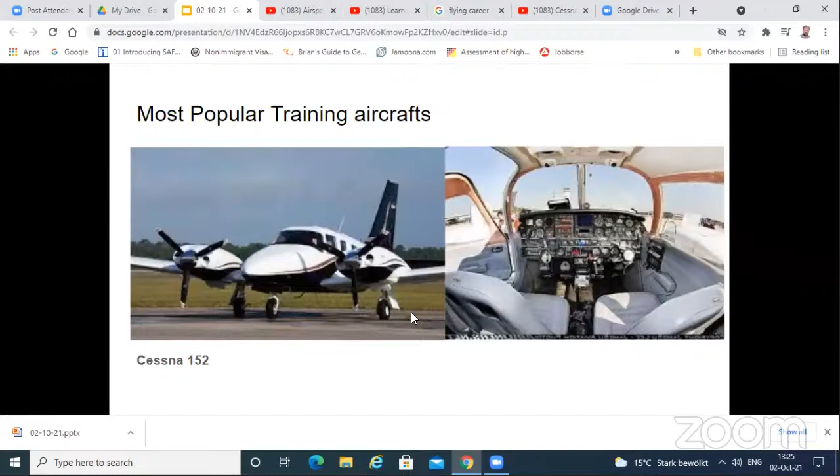There is a message from Paresh. Oh, okay. Okay, so I'll just read it. I think, what is the message? We'll show some videos on air sports activities. Okay. Yeah. Okay.

This is another section which I would like to cover, but since the time is running short, Raghu, can you just quickly tell them what is type rating? Yeah. So basically, type rating is like, we have been mentioning different types of aircraft. So once you are done with your basic training and you are going for an airline, you fly that specific aircraft which the airline owns, like the fleet of the airline. So it could be an Airbus, it could be an ATR. So you start from scratch to learn about that specific aircraft. It's technical.

Can I continue? Yeah, continue. So, for example, once you go on an ATR aircraft and there is a set of... Subash, can you just play that video? That will be more helpful. So it's not an actual aircraft. They train in this kind of simulator where they simulate the real flying experience and you do all your training in that.

With all of the tedious ground schoolwork out of the way, it's time to really start learning the Embraer 145 by beginning simulator training.

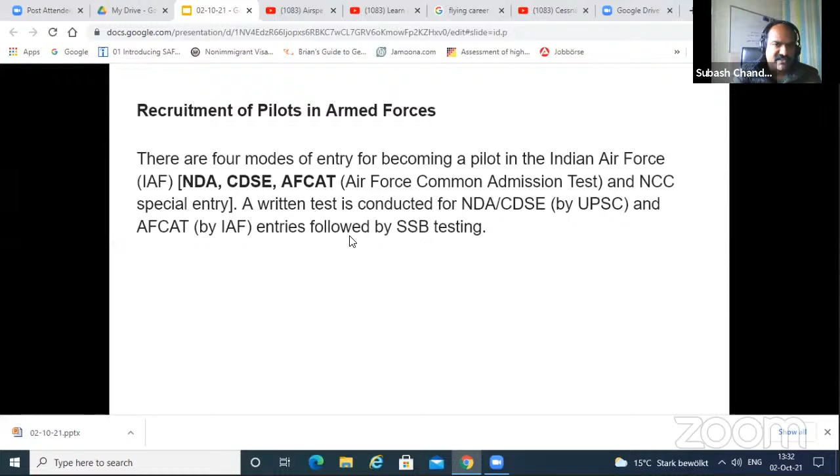And apart from that, now I will take off; we have Paresh, who will be basically discussing or showing you about aerosports activities. What are the other aerosports activities? Now, pilot is there, but without having a license, what are the other things you can do? You can do gliding, you can do paragliding, you can do hang gliding. Of course, microlight flying also you can do. Then aero modeling, hot air balloons, not aerobatics, sorry, skydiving. I have the videos over here, but Paresh will also show you all these things.

Paresh? Yeah. You're ready, no? Yeah, ready. Okay. Paresh, can you share your screen? I'll just stop share. I'll stop it here. Now you can share your screen. Yeah. Okay. You can show from your camera. Yeah, that is fine.

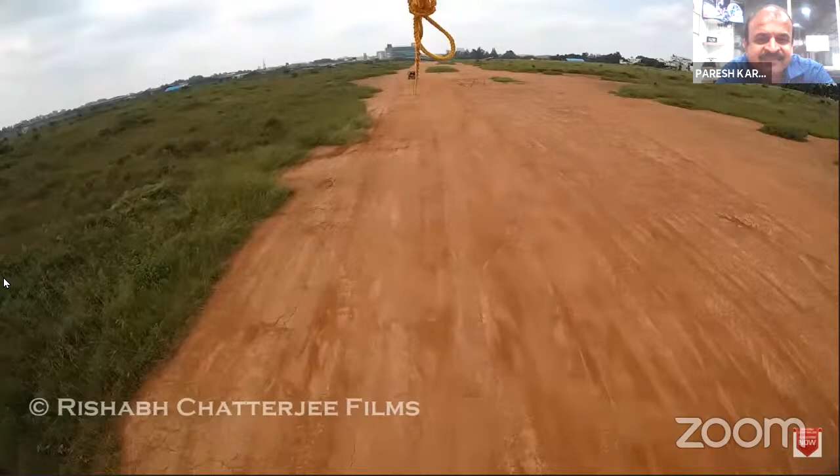As we continue to pull, the work that is done by an engine in an aircraft is done here by the tow vehicle. The tow vehicle gives you the forward thrust, and in return for the forward thrust, you get lifted up in the air. That is how we control the parasailer. How high or how long he can be in the air is decided by the person driving the vehicle. You can see here a nice, beautiful view of Jakkur Aerodrome.

This activity is, as I told earlier, for the common man. Every student, every family member can participate. It is one of the safest activities when done by professionals. This is how the parasail looks, and one view of the landing. You can see that it's a really very safe, soft landing. All this happens because before the start of the activity, we give basic training. We tell you how this activity is done, and then you can participate. So this is one activity.

I am now here with a close friend of mine, Mr. Srinivas. He is a manufacturer of paramotors. What I plan to do is put on my mobile, go to the paramotor, and show you how a paramotor looks. The paramotor is basically a free flying activity. The same principle that applies in an aircraft applies in the paramotor. I will show you the trike.

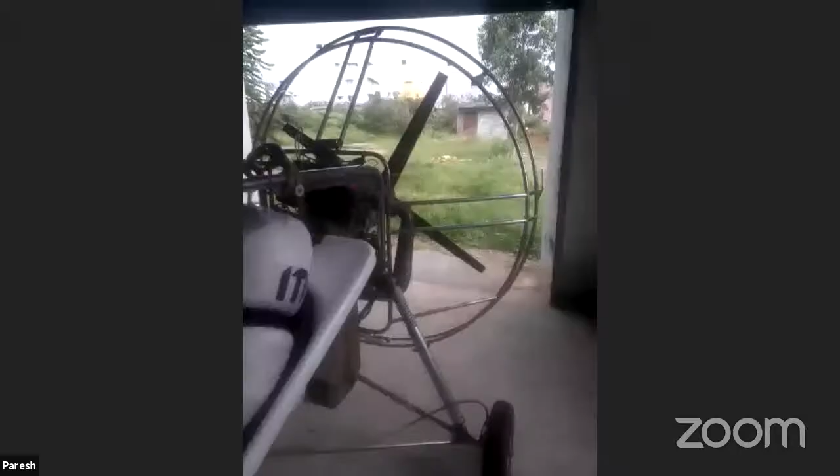Hello. Sir, audible? Okay, thank you. Yeah, I think I was on mute.

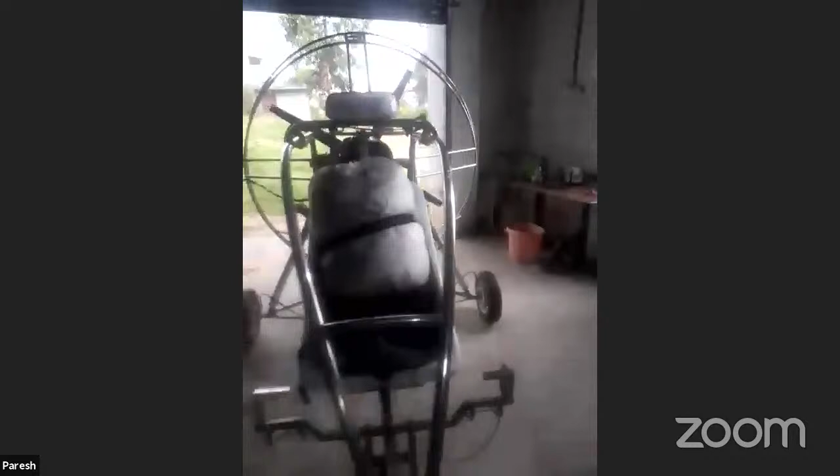Now what you can see is the paramotor here. This is basically called a trike. It has a similar concept like an aircraft. It has a nose wheel and 2 main wheels which are used at the time of takeoff and landing. The two people, the pilot and the passenger, will sit here. In most of the cases, the pilot sits at the back here in the back seat. The passenger sits in the front.

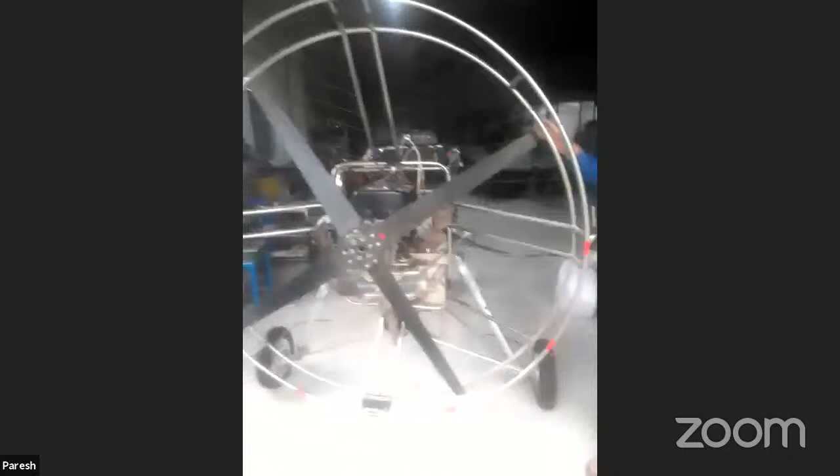Then the glider, the paraglider, is harnessed here, and it will be laid at the back of the paramotor. And of course, we can show you the engine here. One of the world's best paramotor engines. It is used in small aircraft. It is called the Rotax 503. There is a 4-blade propeller. Earlier, Subhash has discussed at length how an aircraft flies.

So when this propeller comes on, when it starts rotating at a particular speed, the glider that is laid behind the paramotor will get lifted up. Some time back you saw the parasail, how when it is pulled, the parasail moves up. A similar thing happens here. When the propeller rotates at a certain speed, it creates enough thrust. The paraglider, the wing, gets lifted up, and then the entire trike starts moving forward, and you get airborne.

So this is one of the safest aerosports, but safe when it is done under proper guidance and with proper knowledge. All aerosports and aviation is actually high risk, but it is also safe when it is done with proper knowledge. So this is the paramotor. I have a video of the paramotor.

Unfortunately, due to weather, I am unable to show you the wing, or else I would have laid the wing on the floor and lifted it up from the ground to show you how the wing looks. But also there is shortage of time. So we will move on to the video. I will show you a 2-minute video and then talk about another aerosport activity which is called the powered hang glider. I'll need just about 2 minutes for that, and then I'll be done. For more details, we will probably catch up some other time.